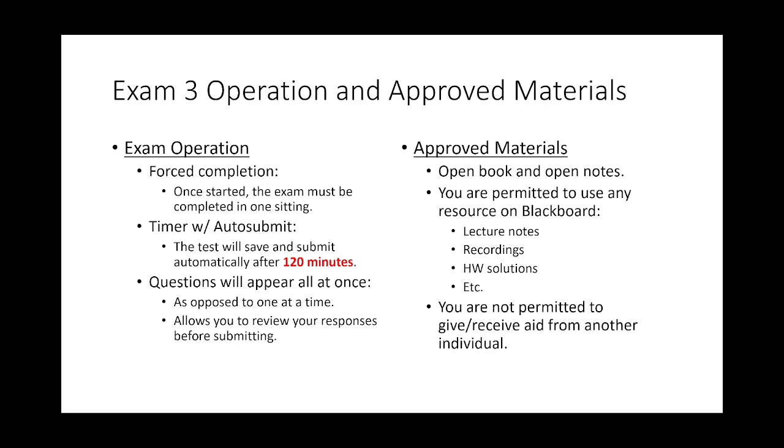But you've got the lecture notes, you've got the solutions to all the homeworks, you've got the recordings. You can even pull those up. You can pull up the OneNote that has all the calculations, all of that. I have no problem with that. It will contain 4 to 5 conceptual questions, and it will contain 3 computational problems.

I'm going to go ahead and tell you one of the problems is going to be a Mastan related problem, but it's not going to be one where you have to use the software. It's basically going to be one, and I don't want to reveal too much about it, where you look at the structure and you're going to have to answer certain questions about how you would model it. For example, things like how many joints would you use for this structure, and I might have you compute some values associated with that.

If you remember, there are certain things that you have to account for when you use Mastan, things like common coordinate systems, things like consistent units, stuff like that. So if you understand how to use Mastan, which hopefully by now everybody has a good enough experience set for, you should be fine. I mean, we've had the in-class exercises, we had the homework assignment, we had the projects. You all have enough experience with that I think you're going to be just fine with that.

Let's talk, though, about what topics are on the exam, and then I'll open it up for questions. So really the 3 big stars on the exam are influence lines. That's probably the biggest topic that we covered since exam 2. So you have to be able to draw an influence line for a given response at a given point. So a vertical support reaction, shears and moments at a given support, or at a given point, fixed supports. I will not make you do a truss influence line. I'll go ahead and tell you that. I'm not going to do that.

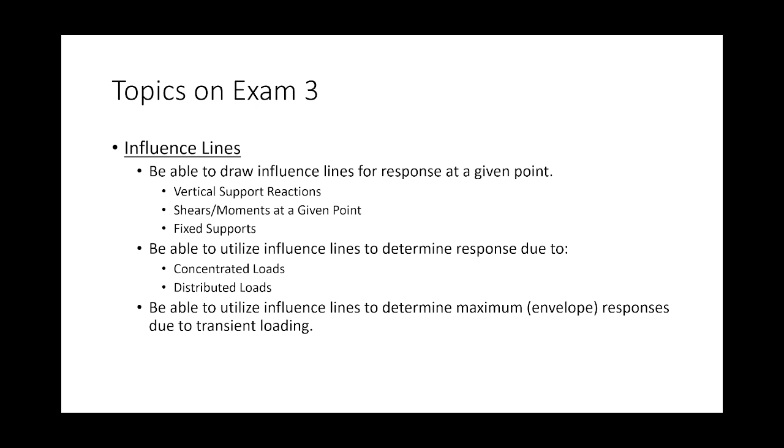Be able to utilize those influence lines to determine response. This was like homework 8.4, and be able to utilize the envelope responses due to transient loadings. This was like 8.5, in terms of the homework assignments. For computer analysis, basically be able to demonstrate a general understanding. Pre-processing is really what I'm most interested in, your ability to understand how a model is crafted, or how a model file is generated. I'm not concerned too much with your ability to post-process because I'm not going to make you run Mastan, okay? But you do need to understand the basics of Mastan operations.

So remember, there are 5 modules that you utilize in Mastan. There's the geometry module, where you're crafting the nodes and the elements and the connections. There's the properties module, where you're defining and attaching materials and section properties. There's the conditions module. Conditions is where you apply boundary conditions, apply loads, etc. You analyze the structure, and then you post-process the results.

And the final topics on the exam are what we've been talking about this week. So be able to utilize and or derive analysis aids in performing basic structural analysis. This was like homework 9.1. This was homework 9.2. Be able to demonstrate an understanding of tributary width or tributary area.

And as you know, for the exam review PowerPoints, which this is on Blackboard right now, so everybody has this, I like to give you a one-stop shop. So this is all the greatest hits, if you will, the formulas necessary for what's going to be on the exam. So influence lines, make sure that you can plot those for reactions.

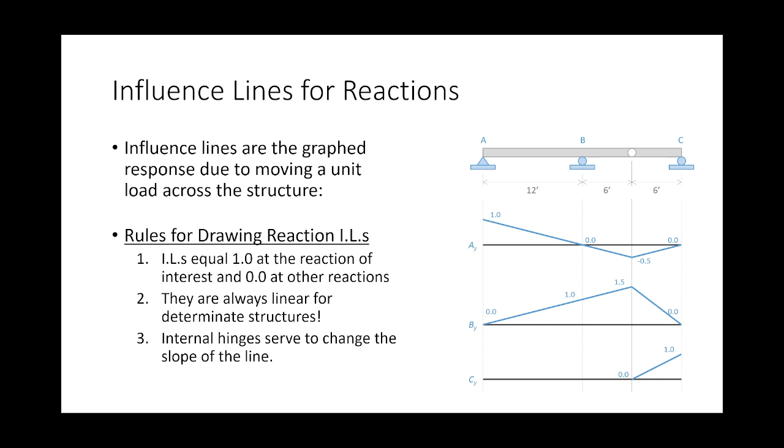So these are sort of the rules for drawing influence lines for reactions. These are the rules for drawing influence lines for internal shears and moments. So remember, with moments, we say that this slope plus this slope equals 1, so that slope plus that slope equals 1, and then we recognize that the unknown is the height, and so we can solve for that height pretty easily.

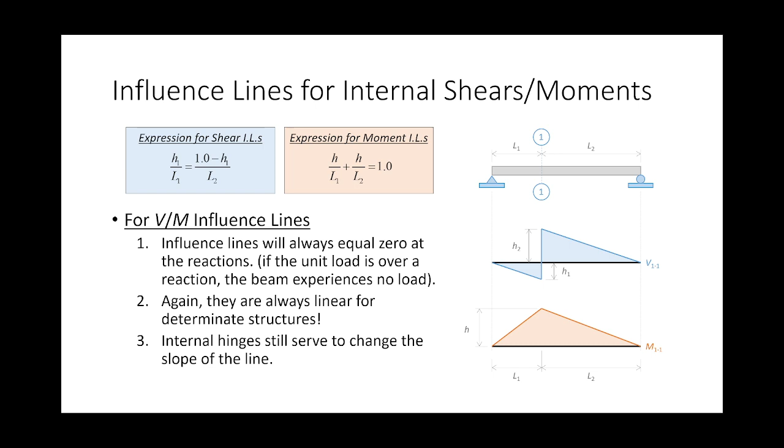For shears, we know that this slope and this slope are equal, and this height plus this height summed together equal 1. So it's sort of a two equations, two unknown standpoint, but again, it's not too challenging. Oh, for shears and moments, also don't forget that whenever you're drawing an influence line for internal shear, internal moment, those influence lines always equal 0 at the supports, because if you put a load at the support, there's nothing going on inside the structure.

So, remember, I discussed this during the first Mastan lecture, but basically what Mastan is doing is it's writing a stiffness matrix for every member, every element in the model. It's assembling them. It's knocking out the rows and columns associated with the boundary conditions, and there's your stiffness matrix. And then it does the same thing with the forces, and then it says, I got the forces, got the stiffness matrix. It solves for the displacements. Then it takes those displacements, back substitutes them in to get all the forces in the members and the reactions, et cetera. And that's kind of how matrix analysis works.

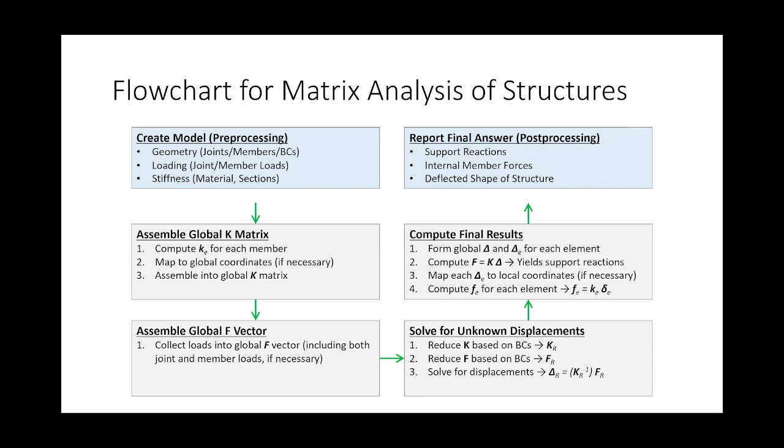That's the 30-second version. If you're ever interested, there's a course called finite element analysis where you go through that. That's like the whole purpose of that class, is to understand computer analysis of structures. It's a really, really good class.

For the fundamentals of matrix analysis, this is sort of the key stuff that you need to understand when you start building a model. So you remember the terminology. The terms joint and node are going to be used interchangeably, just like the terms member and element. When it comes to units, whether the software program does this for you or you as the analyst need to do this, all the units need to be consistent.

So all the forces need to be in a consistent unit system, and all the lengths need to be in a consistent unit system. What we typically do as analysts is we ask ourselves, what do we want the deflections to come out as? And then that's our length unit. So in US units, we typically express the lengths in inches because we want our deflections to be in inches. And in metric, we take our lengths and express them in millimeters. So you might have a beam that's 2,000 millimeters long, something crazy like that. But we do that because we want the deflections in millimeters.

As for the forces, we typically use a larger force unit like kips or kilonewtons. We could use pounds, but then our numbers get really big. We have really, really big numbers. So kips are a little bit more convenient.

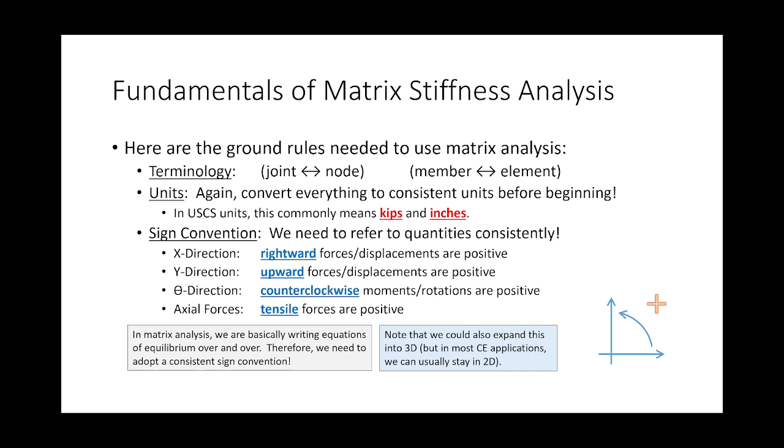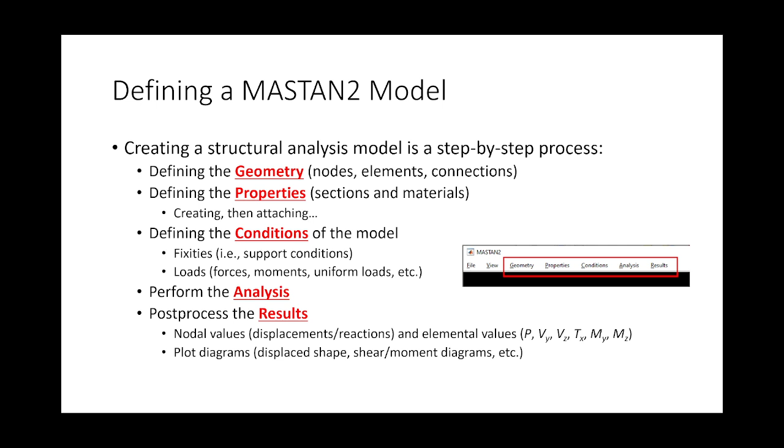Let's see, what else? Okay, defining a Mastan model. Remember, these were the 5 menus, and if you go through those menus sequentially and define everything you need to define, Mastan will work just fine. Geometry, properties, conditions, analysis, and results. This is just me giving you definitions for nodes and elements.

Nodes are where the software will directly compute the deformations. And so in matrix analysis, you compute the deformations directly at the nodes, and you interpolate everywhere else. And so generally for civil engineering structures, you should put nodes at support locations, internal hinges, truss joints, locations of point loads, although that's not totally necessary for given structural analysis packages, but for Mastan it is. At other points of interest, if you want a deflection at a given point, put a node there.

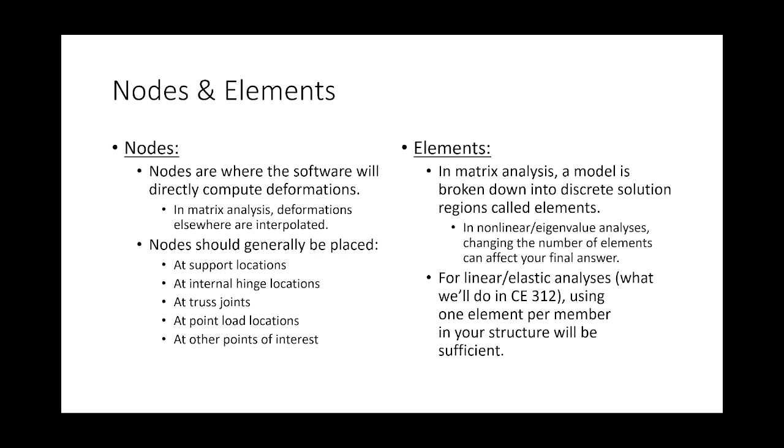Elements: the way matrix analysis works is it writes a stiffness matrix for each element and then assembles that into a stiffness matrix for the whole system. So the model is broken down into these discrete solution regions called elements. And for linear elastic analysis, which is what we do in this course, we just use one element per member.

When we're doing geometry definition in MASTAN2, we have to use a consistent origin. Remember, we looked at this 100-inch long beam, and we said any of these coordinates would be fine in defining the length of the beam, because as long as your origin is consistent, what MASTAN2 is going to do is take the difference between the coordinates and recognize that that's a 100-inch long beam.

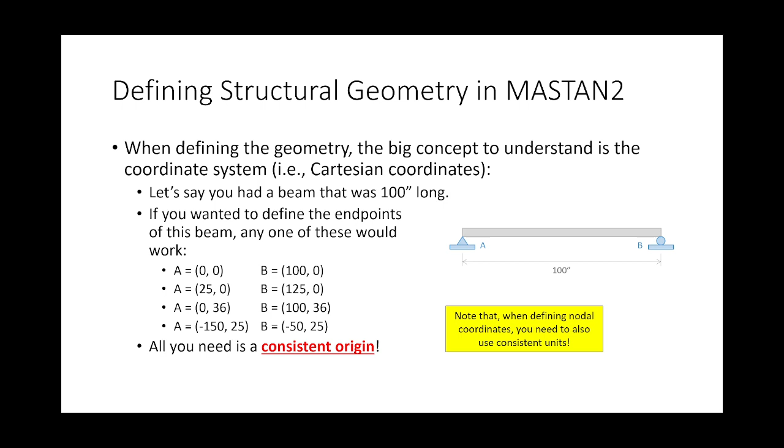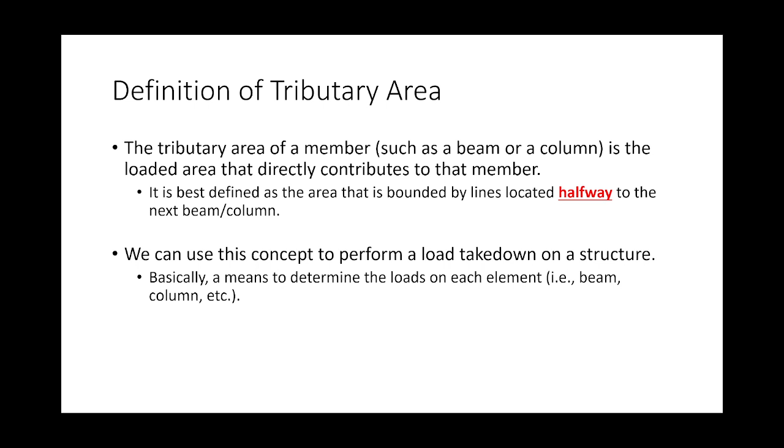Tributary area, this is really sort of the last thing that I think is unique. We did have analysis aids, but I don't really think analysis aids are adding anything to the conceptual discussion because we're just using math to derive equations for shears and moments and whatnot. But tributary area, maybe that should be formally defined, that that's the loaded area that contributes directly to a member. It is typically defined as halfway over between adjacent elements. We use those to perform load takedowns.

That's right, I have ink annotations because I had a typo on the first slide. All right, that is the exam. That's what's on exam 3. I'm going to shut up for a second and entertain questions from the people in this room. The floor is yours.

Ready for the semester to be over? Well, we're almost there. We're almost there. I know it's been a transition, you know.

Yes? As far as analysis aids go, was there a slide where those were provided, or would those be allowed on the exam if we would benefit from them? That's a good question. What I will tell you, without revealing too much, is that there will be no useful analysis aids beyond what's already been provided. So by that I mean homework 9.1 and what we did in the example will largely be all that you need.

And here's why I don't provide a big list of them, which, by the way, you could Google them and find them right now. If you download a set of analysis aids right now, there's like 50, 60 of them, and you've got to sift through a bunch of them to find the one you need, when I'm telling you, you're only going to need 1 or 2 of them. That's why I don't want to say, oh, here's this massive pile of stuff, good luck. You don't need it. I'm not going to expect that you need more than are already currently available to you.